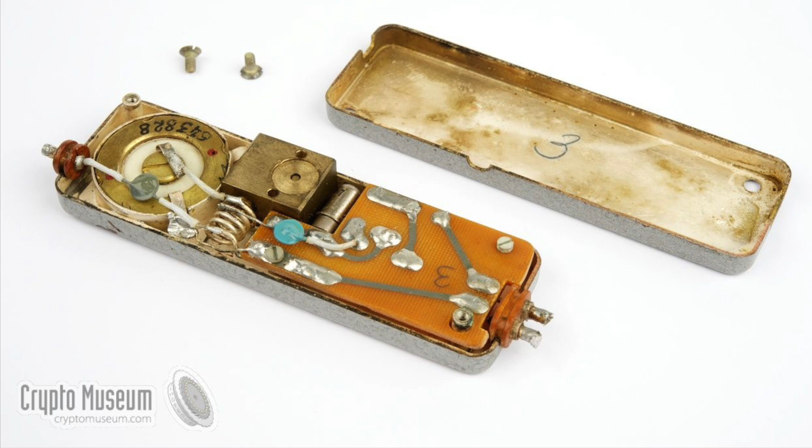During those 8 years, the US government decided to conduct exhaustive investigations within other embassies, missions, and consulates maintained in other nations. The search turned up about 130 additional secret eavesdropping devices, but none gave quite the same emotional shock as that first one discovered in Moscow, and none were as cleverly designed as the Moscow bug.

The eavesdropping device shown by Lodge was one of the first covert listening devices, or bugs, to use passive techniques to transmit an audio signal. It was designed by Soviet-Russian inventor Leon Theremin, best known for his invention of the theremin. It consisted of a cylinder about as big around as a quarter and measuring 17.4mm from front to back. A 9-inch rod protruded from one side, and on the front of the cylinder was a perforated cover incorporating a diaphragm.

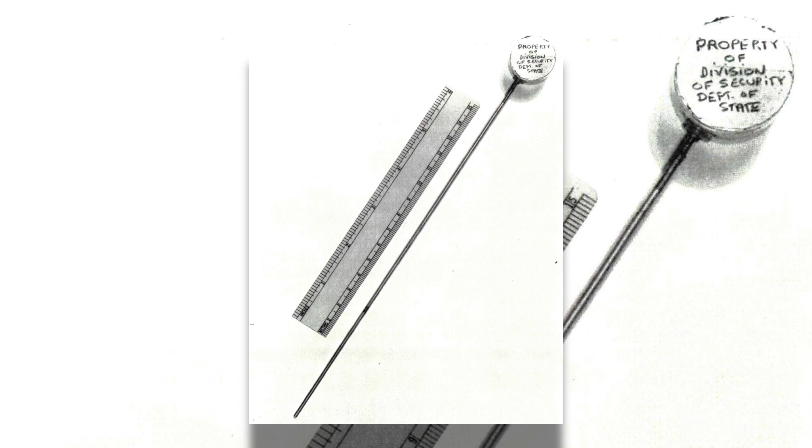In operation, the bug was hidden within a cavity between the front and back sections of the Great Seal, which was made of maple. Just below the beak of the eagle were several tiny holes drilled to coincide with the location of the diaphragm. Those holes let in sound waves.

Though by today's standards this bug was somewhat large and cumbersome, it performed the same task and operated with the identical theory of operation. The purpose of a room bug is to convert acoustic energy into electrical energy so that the information, speech, can be sent via wire or radio signal to a listening post. The Great Seal device used the radio method in a manner so simple that it amazed technicians of the day.

It had no circuit as such, and since the Soviets wouldn't be able to continually change the unit's battery in order to keep it going, it had to be designed without any power source. In the 1950s, this was a pretty tall order. The Moscow bug, which was constructed of copper that had been silver-plated, was hollowed out inside to such close tolerances that it created a sharply tuned, so-called high-Q cavity. The State Department's intelligence service had estimated the Q factor to be as high as 1,000.

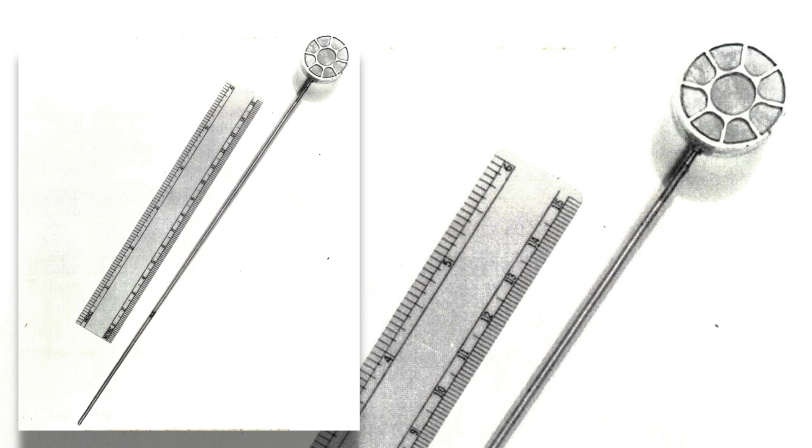The monopole antenna was a quarter wave for 330 MHz, but was also able to act as a half wave at 660 MHz or a full wave at 1320 MHz. The post and antenna plate were also capacity coupled. The back cover was threaded for precise adjustment of cavity size.

In actual operation, the Soviets placed a transmitter with a directional antenna at a nearby spot. Out of that transmitter came a signal at about 1600 MHz. The antenna was probably a small dish type, like a radar dish, and the signal was also radar-like except that it wasn't pulsed. The RF beam struck the bug's small antenna and a feeble signal echoed back. As long as the antenna kept the same electrical length, the echo would remain at the same frequency.

Any person who spoke near the Great Seal generated sound waves that struck the bug's diaphragm, causing it to vibrate. This altered the cavity's size ever so slightly and varied the capacitive values of the device. The changes in the capacitance altered the charge on the antenna rod radiated to it from the transmitter and caused its echoed signal to vary accordingly. In effect, the bug modulated a small piece of the beam's signal before returning it as an echo. The echo was picked up by a receiver and demodulated to reproduce the sound of the original speech.

At the time, the State Department observed that the bug was especially difficult to detect because its power was controlled by the eavesdropper. They likened the device to the echo boxes that were once placed in front of radar units to tune them. The entire bug weighed just over 1 ounce, and its cavity had an inductance of 1/100th of a microhenry.

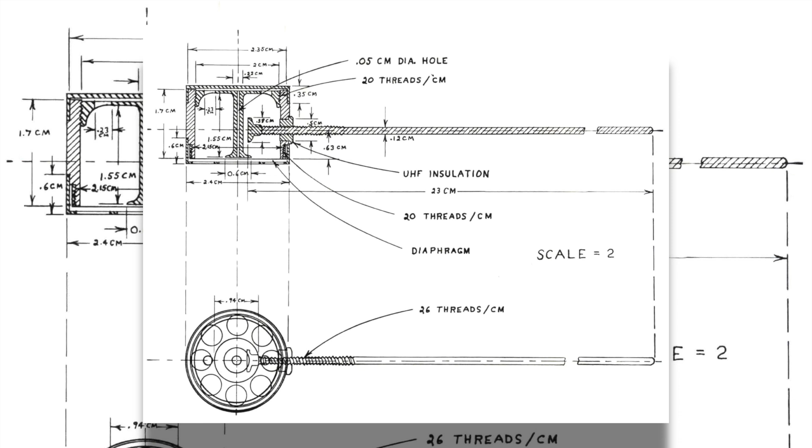In the 8 years after the bug was discovered, it was put through many tests by electronic experts. They reported that it worked well in free space, but was extremely sensitive to its environment. It must have caused the Soviets some headaches once in a while because its operation was so critical. It went haywire when any small piece of metal, i.e. a nail, a wristwatch, a tie clip, or even a pair of shoes, was placed near it.

The thing was discovered accidentally in 1951 by a British radio operator at the British Embassy who overheard American conversations on an open Soviet Air Force radio channel as the Soviets were beaming radio waves at the ambassador's office from a block across the street. An American State Department employee was then able to reproduce the result using an untuned wideband receiver with a simple diode detector, similar to those found in some field strength meters.

The State Department conducted a counter-surveillance sweep of the ambassador's office using a signal generator and a receiver in a setup that generated an audio feedback if the sound from the room was transmitted on a given frequency. During this sweep, they found the device in the Great Seal carving.

The FBI, the CIA, the Naval Research Laboratory, and other US agencies studied the device as part of an investigation involving the British MI5 and a technician from the Marconi Company. They managed to get the thing working on 800 MHz. The membrane of the bug was extremely thin and was damaged during handling by the Americans, so the Marconi technician had to replace it.

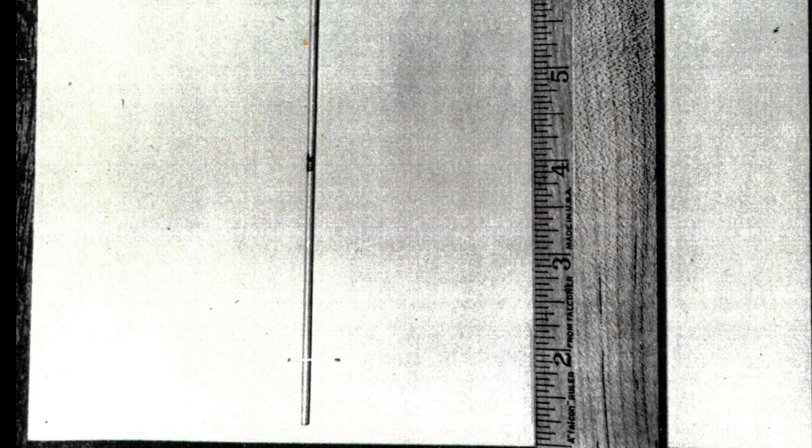The simplicity of the device caused some initial confusion during its analysis. The antenna and resonator had several resonant frequencies in addition to its main one, and the modulation was partially both AM and FM. As the years went on, bugs became much smaller and techniques for using them became highly sophisticated. They made the Moscow bug look extremely primitive.

US foreign buildings were still vulnerable to being bugged because they were often built by local workmen who could easily fill the whole structure with listening devices that could take years to unearth, especially those that lie dormant until triggered into action upon receipt of a command signal.

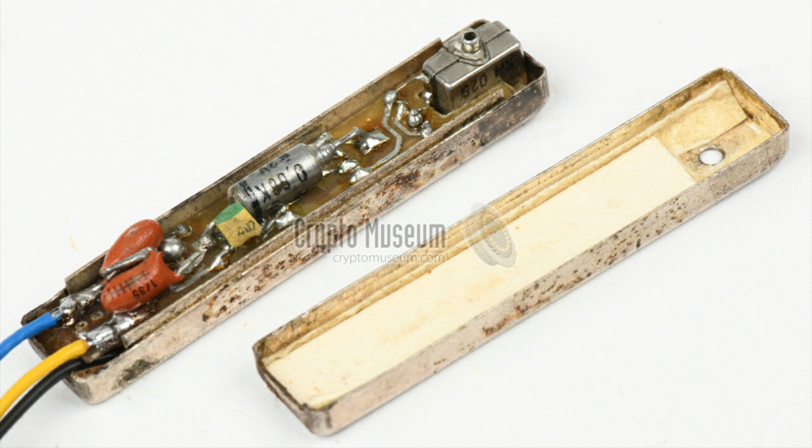Of course, methods of detecting bugs or taking countermeasures against the effectiveness of those not yet located also came a long way. The most basic countermeasure against a room bug was setting up a barrage of noise which would confound the listening device while a conversation was taking place. This could consist of a radio or tape machine playing the sound of running water or an electric fan. Even though a clever professional eavesdropper could eventually figure out how to filter out these noises, there would be considerable difficulty in getting a good copy.

The best masking method was to drown out the bug with a radio or TV playing a talk program, so if the eavesdropper tried to filter out the frequencies of the masking sounds, they'd also have to filter out the voices in the conversation he wanted to hear. Another method used to foil undiscovered room bugs included attaching vibrators, or buzzers to the walls of a room.

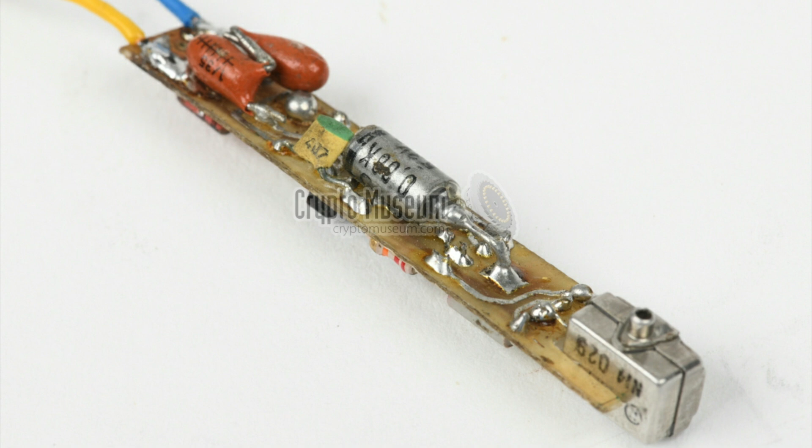An illegal method would include establishing a hash transmitter, a broadband RF device that would send out a signal over a wide range of frequencies in order to jam bugging receivers. The problem with this is that it would often cause interference to the radios and TVs of everybody having the misfortune of being located anywhere near the hash transmitter.

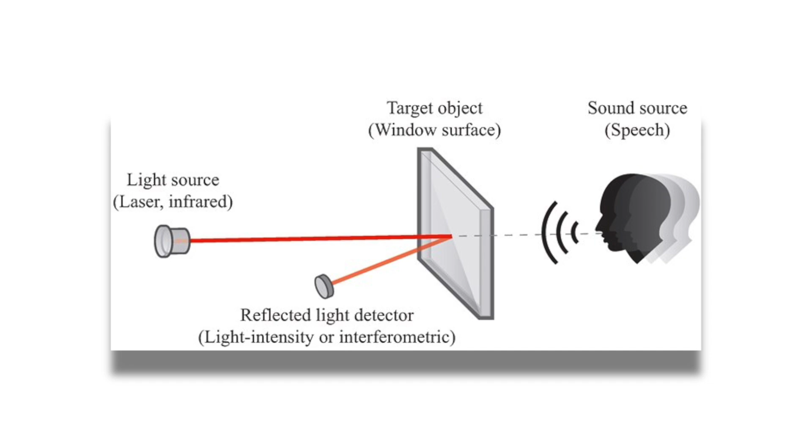One later method of bugging a room was in many ways a redefinement of the 1952 Soviet idea. This system bounced a laser beam at a window pane. Sound from within the room in which the window was located vibrated the window sufficiently to cause the laser beam's reflected beam to become modulated so that the conversation could be retrieved. Of course, the only effective way of avoiding undiscovered room bugs is to avoid talking about anything you don't want overheard, or at least using a pad and pencil to write it out.